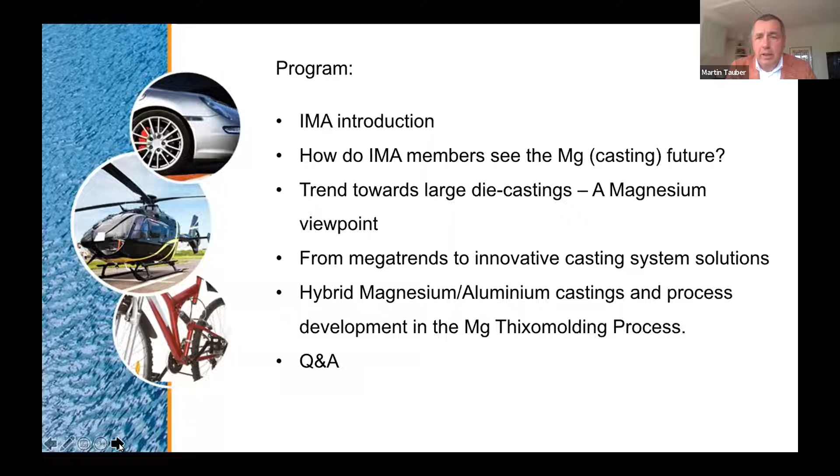What you can expect now in the next hour and 20 minutes or so: you already had the IMA introduction, then we'll show you a small teaser for the industry, especially on casting, and then we have our three presentations, followed by a Q&A. I would like to open up the discussion a bit for the presentations to come.

We made a small questionnaire for our member base, done for the Euroguss event this year in June. It's a little bit focused on die casting, but I think it reflects the whole industry. We see within the IMA that OEMs have a new request or need for weight reduction. We saw that the emphasis on batteries is still there, but there is again the need to make cars lighter, and also to look in that respect for new applications.

From traditional die casting parts, we see a trend toward, for instance, Thixomolding, where we have a presentation today as well. That means electrification of cars will require a new type of parts, which are also served and made via other technologies, the same with 3D printing. I'd say it's coming for magnesium, but not as far advanced as for instance with titanium or aluminium. We'll have a presentation on larger machinery like the gigapress or mega press, so we'll hear a bit more about that later.

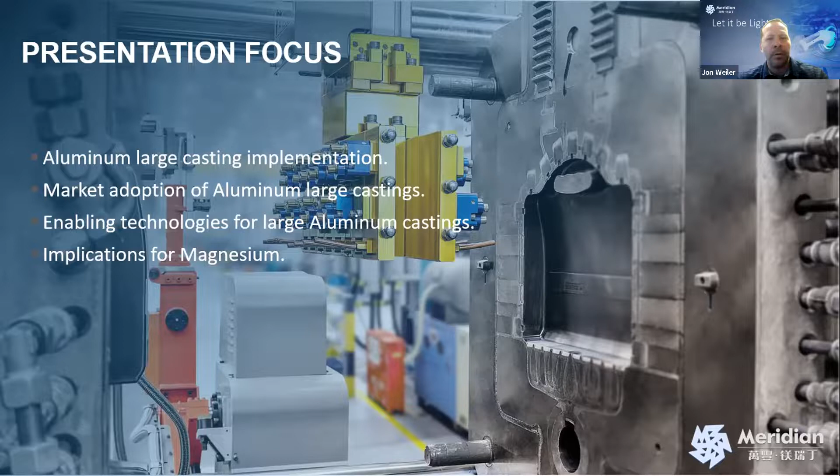The first impression I want to make is when we're talking about magnesium structural castings, and this has been true for a number of years, the key we're always presenting to customers and industry is part integration and consolidation. We're able to get mass reduction, reduction in number of parts, and assembly steps for the OEM. In addition, we get good accuracy and dimensional stability through casting one large shape versus weldments or assembly of multiple components, and we get complex shapes in a single process step.

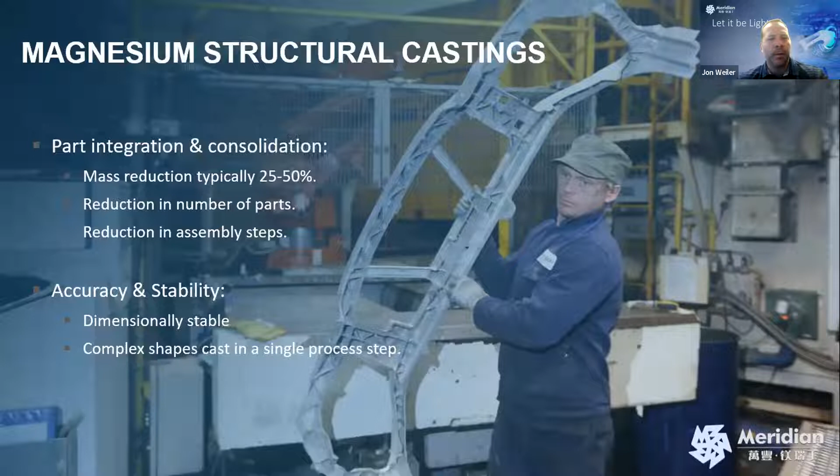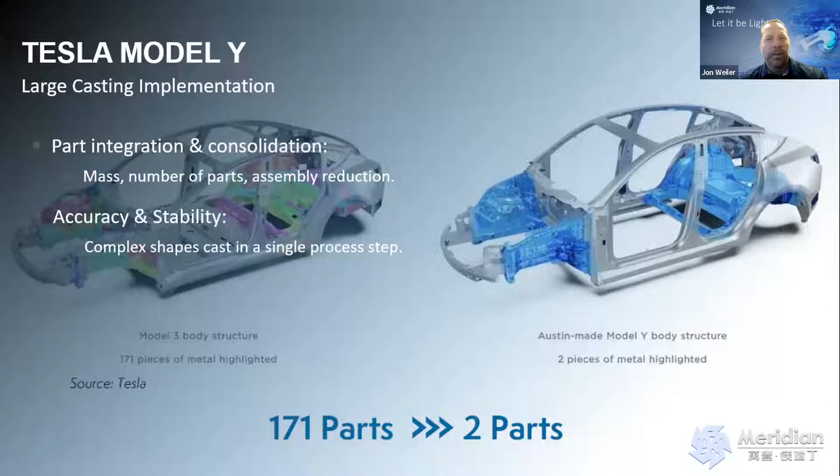As we all know, Tesla has implemented these large or giga castings on the Model Y. This slide that Tesla put out a couple of years ago shows their part reduction—they're integrating and consolidating a number of parts. Obviously it's a part reduction and an assembly reduction in their plant, and they do get some mass reduction in doing this, along with accuracy and stability, casting complex shapes into one step. In essence, what Tesla's accomplished is what we're always pushing with structural magnesium castings—we're looking at the same type of benefits.

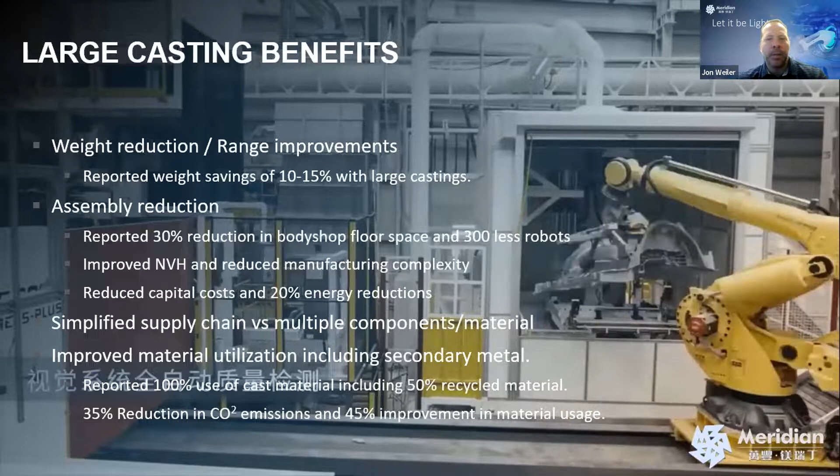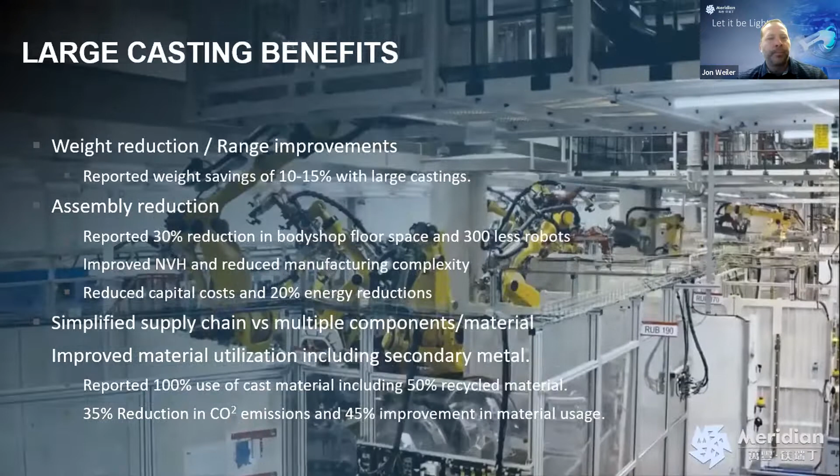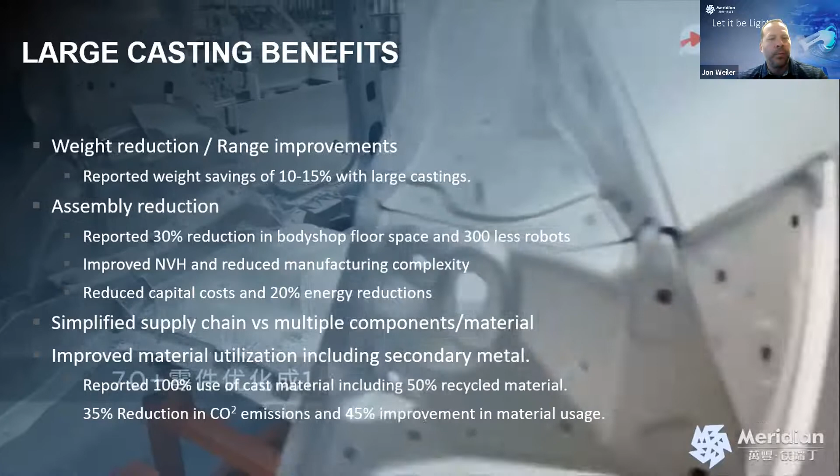Some other benefits that Tesla and other OEMs are impressing upon the market with these types of castings include weight reduction, which translates to range improvements—there's been a reported 10 to 15% weight reduction with these types of castings. There's also assembly reduction: in the OEM's assembly shop they're seeing about a 30% reduction in floor space, and Tesla claims 300 fewer robots are needed. Of course, NVH and manufacturing complexity are improved, along with capital costs and energy reductions in the assembly shop.

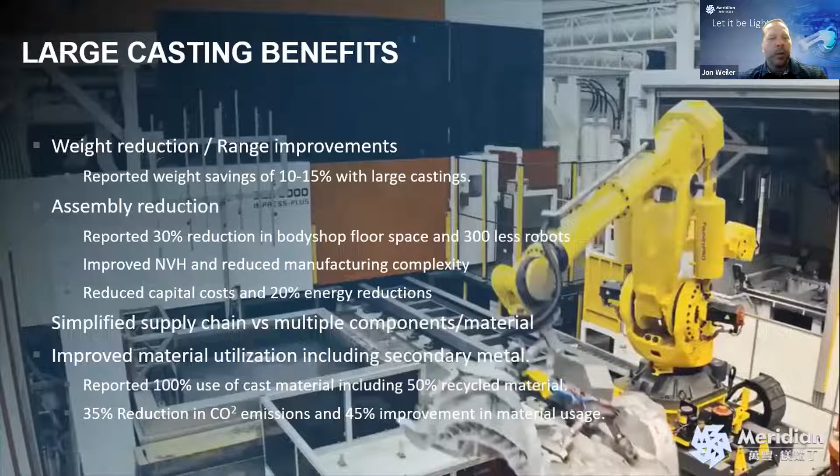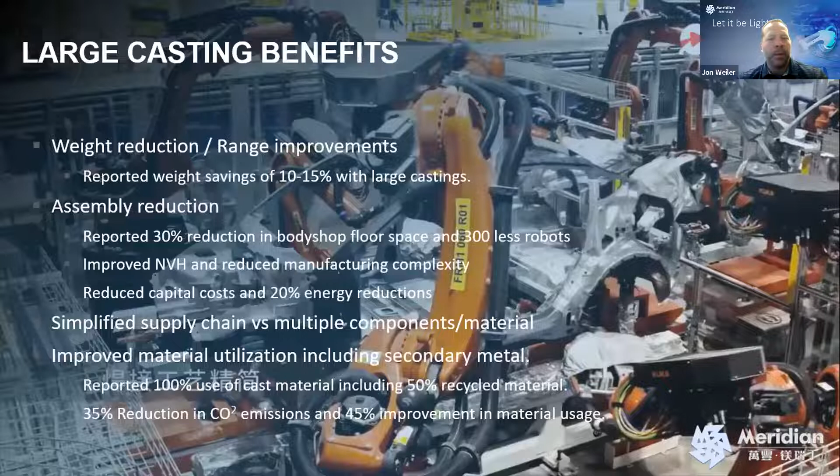The supply chain is much more simplified versus a multitude of components and different materials, and there's improved material utilization, including secondary metal. It's been reported that the plan, I think for Volvo, is to use up to 100% cast material, including 50% recycled material. So we're seeing a lot less waste, and correspondingly reductions in CO2 emissions and material usage in going to these types of castings.

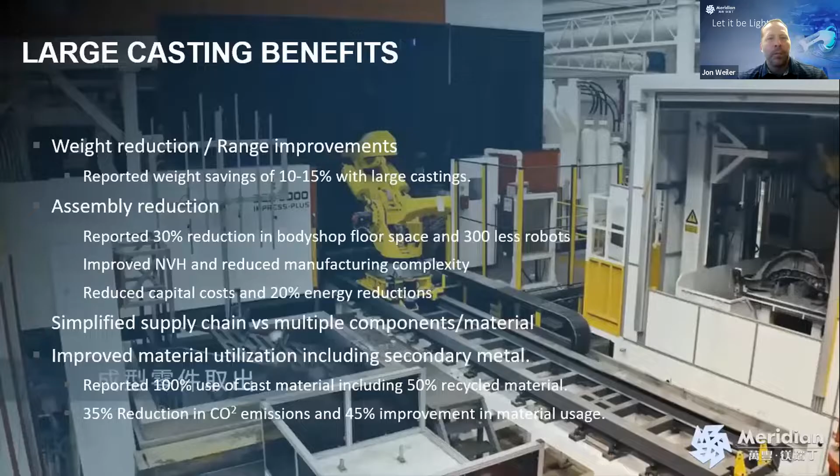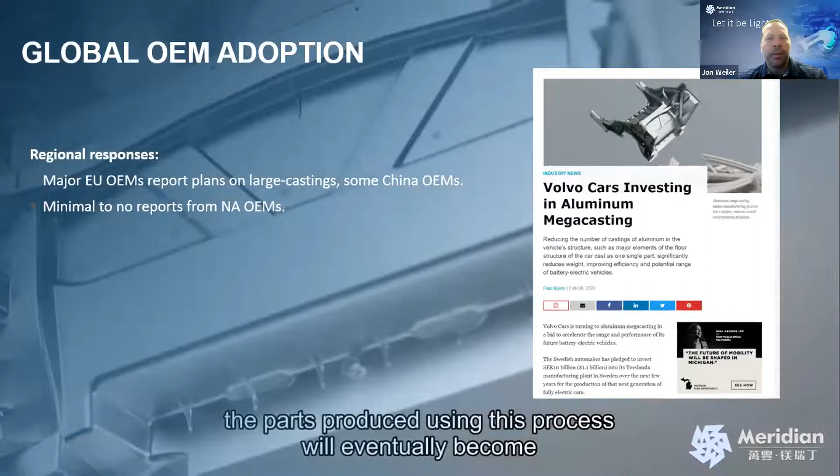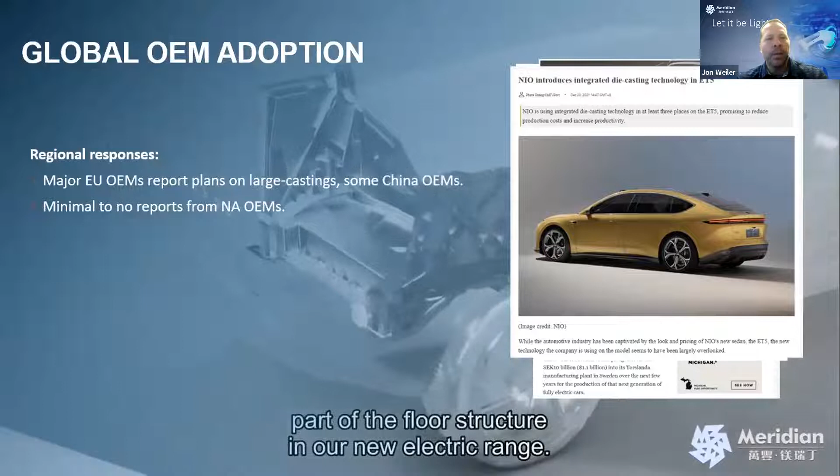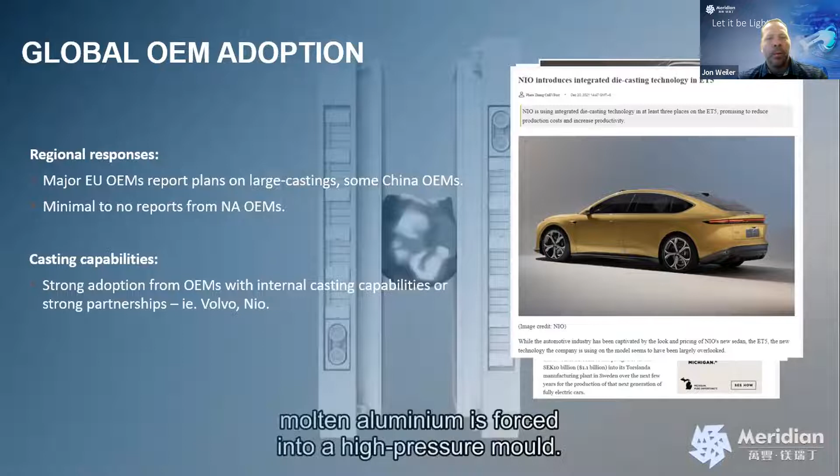So global adoption - since Tesla started this a number of years ago, what we're seeing is Volvo has invested in what they call mega castings in Sweden, getting into these types of castings and ordering large tonnage machines. Volkswagen has aimed to get into this type of casting. Mercedes-Benz is also reported to start using these types of castings. And NIO as well is working with a supplier to introduce these large castings. So we're seeing European OEMs and some Chinese adoption here, but we haven't seen anything in North America up to this point. This is strong from OEMs with internal casting capabilities or strong partnerships, as in the case of NIO.

However, we're not seeing this type of adoption everywhere. BMW, as of last year, is planning not to implement these, due to their evaluation of expensive repairs, casting costs, and because they have other efficient methods to manufacture the chassis in their electric vehicles.

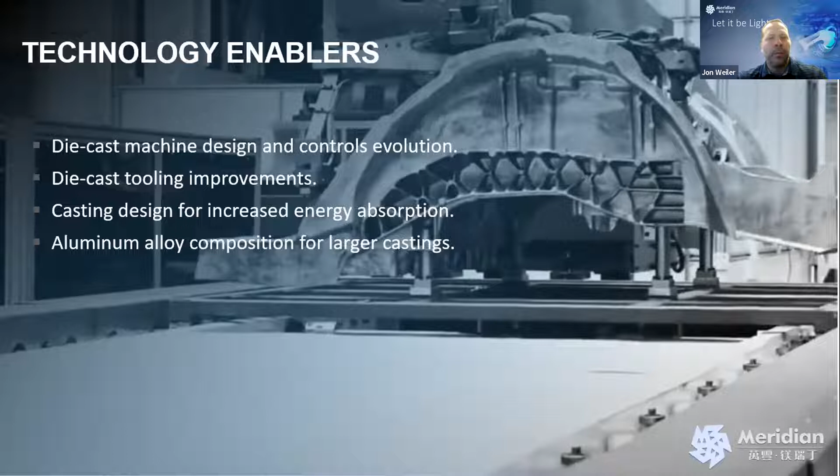So some of the technology enablers that have allowed this type of large casting are die-cast machine design and controls evolution, improvements in die-cast tooling, casting design for increased energy absorption, and new aluminum alloy compositions targeted for these applications. I'm going to go through each one and give some information on how these have evolved or improved over the current standard from the last several years.

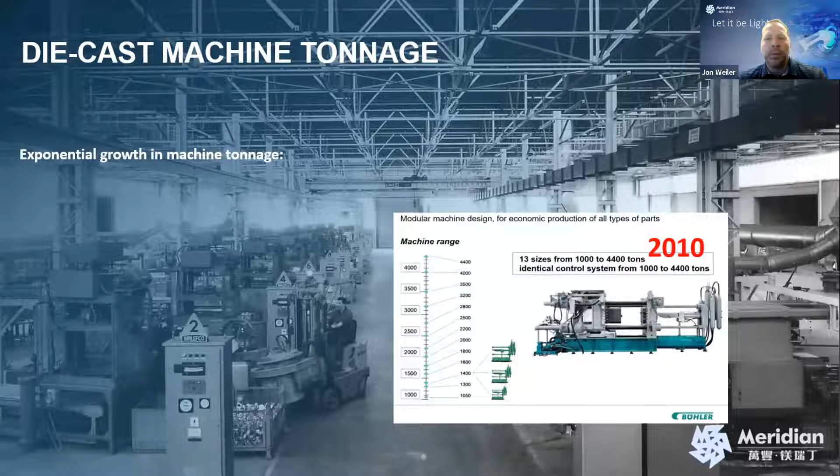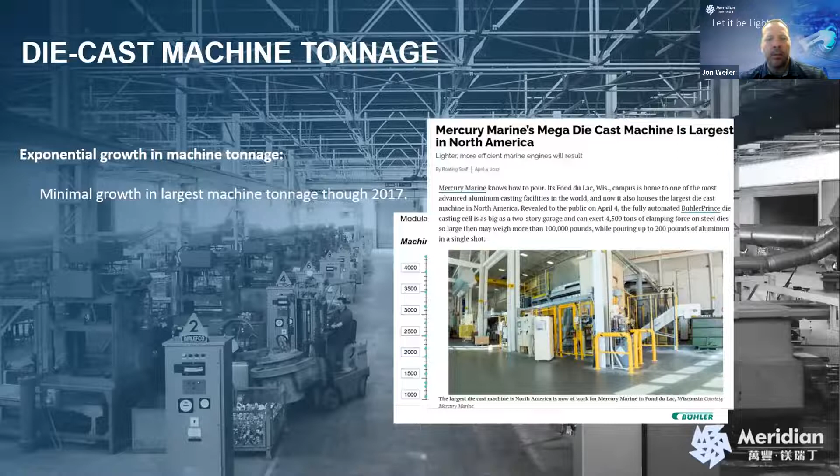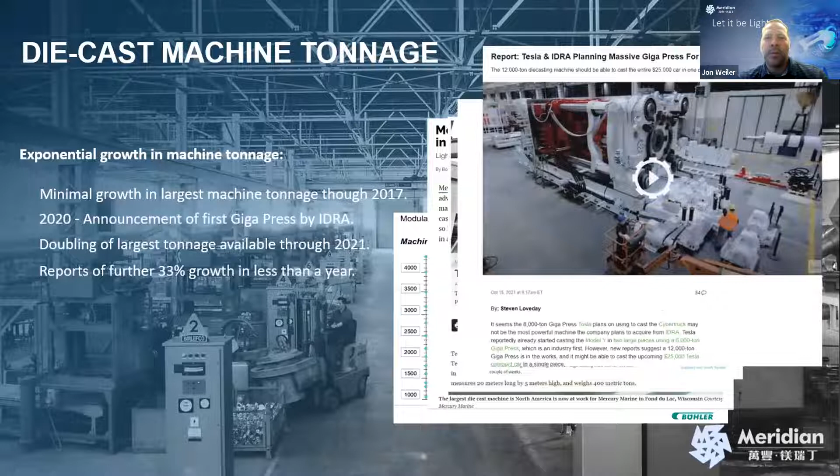Die-cast machine tonnage: this is a slide from Bühler in 2010, showing 4,400 ton machines available on the market, all the way up to 2017, where Mercury Marine is advertising a 4,500 ton machine as the largest in North America at the time. So not much size growth in those years. Then we get to 2020, up to a 6,000 ton machine by IDRA. Later that year, we're looking at 9,000 ton machines, and even further, 12,000 ton machines have become expected on the market. So we're seeing quite a large growth in machine size, enabling these large and even larger types of castings.

Controls evolution: a number of die-cast machine OEMs have improved their machine design and controls in different avenues, including injection systems and hydraulic systems - looking at closed loop regenerative injections, reducing cavitation of the oil from traditional designs, increased pump capacity through separating the closing and injection systems, and high flow hydraulic manifold blocks. So beyond larger machines, we're seeing evolutions in controls, enabling better control and better precision castings.

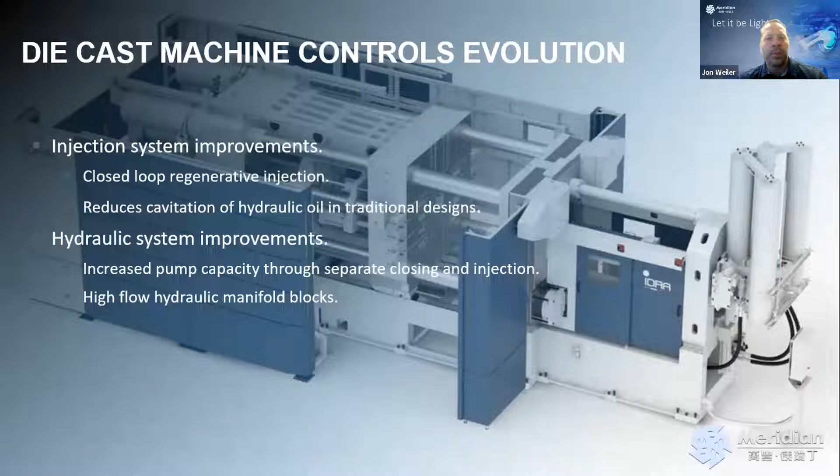Large casting tooling improvements: we're seeing improved thermal management - multi-zone die heating, micro spray for die lubricant, shot sleeve technology. We're looking at heating and wear replaceable inserts to account for thermal expansion, plunger tip design and different material selection, and of course venting and air management - different chill vent designs and modular vacuum systems with multi-channels to improve evacuation of the die.

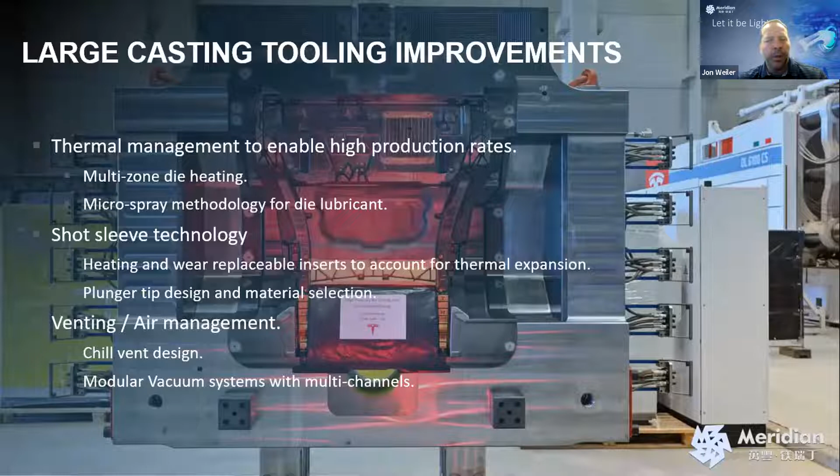We're also looking at casting design for energy management. As electric vehicle design has moved towards a new architecture with structural battery packs, we can enable these large castings. The casting design process involves typical ribbing, variations in thicknesses, and transferring load efficiently. We're able to use alloys with limited ductility versus the traditional wrought alloys used in these types of applications.

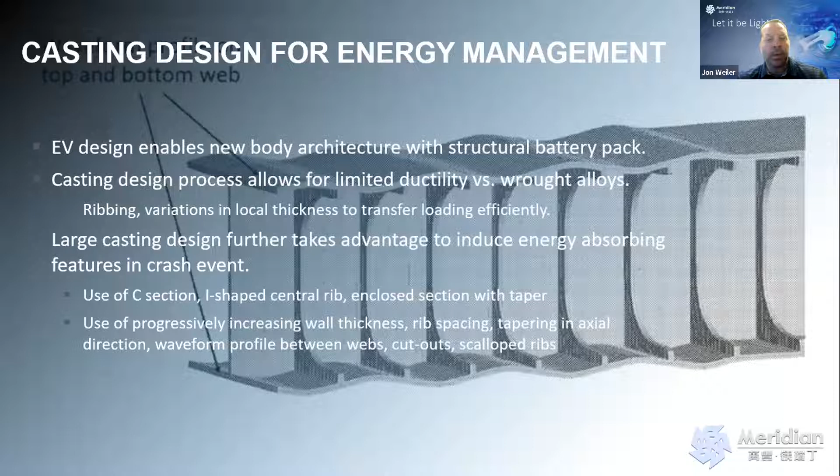Even further, there have been designs in these castings to induce energy absorbing features - the use of C-sections and I-shaped central ribs with waveform profiles, cutouts, scalloped ribs, enclosed sections, and tapering in the axial direction. This is an excerpt from Tesla's patent application, where they have this type of design to absorb energy in a crash situation, shown in this image where the casting section absorbs all the energy rather than buckling right away.

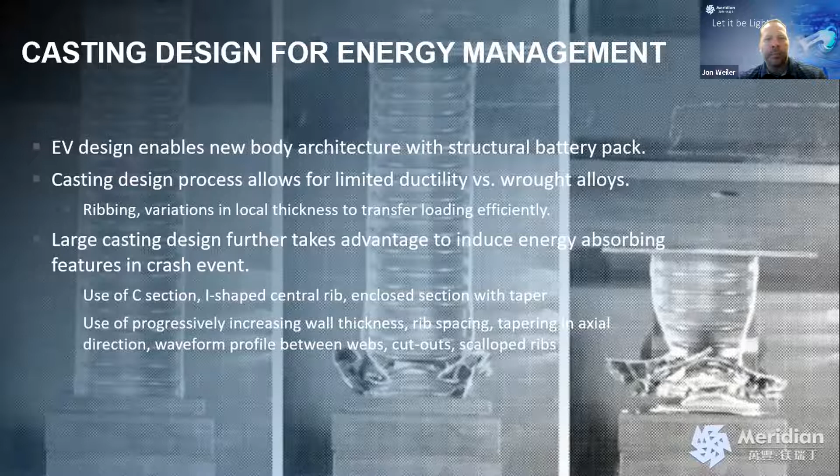So what do all these things mean for magnesium? I'm going to start with the more simple things.

So most of these improvements are beneficial: getting better controls on the die-cast machines, new die-cast tool improvements, and optimizing the die-cast design. These are just going to help magnesium. We're going to improve the consistency in the process, the ability to control with the tooling, different thermal zones, with the controls on the machines, and of course optimizing the cast design. We can look at different ways to optimize the weight and performance of the casting.

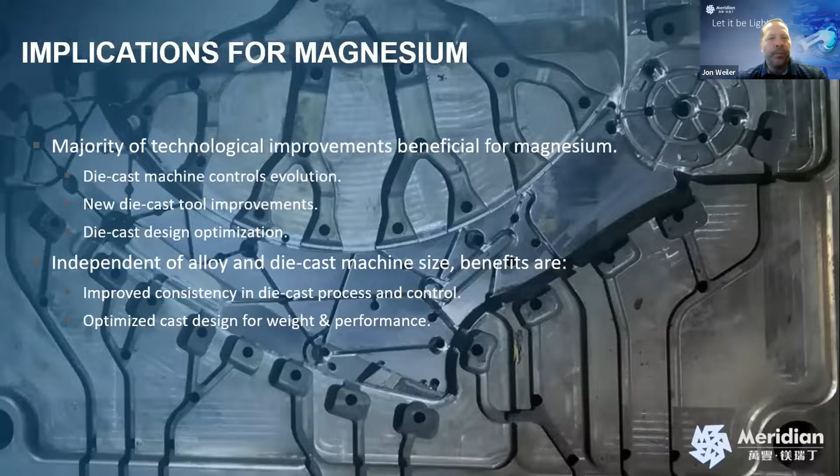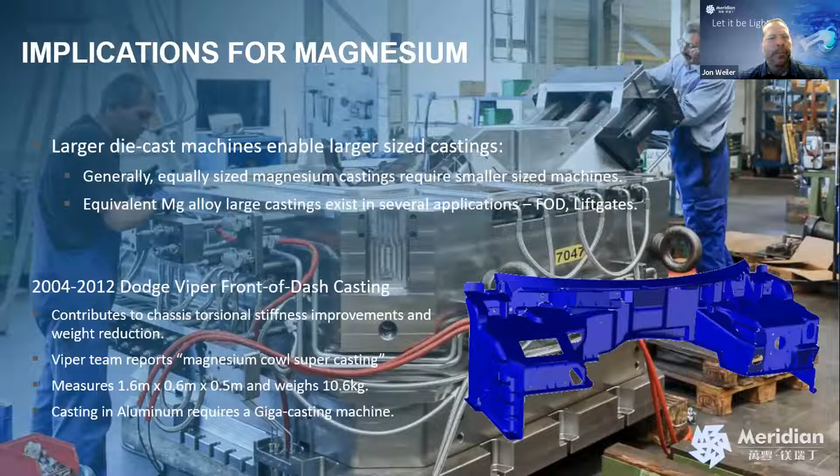And then the last one was the aluminum alloy. So again, the aluminum alloy was developed for strength, ductility, castability with no heat treatment. These target properties we're looking at: yield strength of about 130 with good castability and no heat treatment. It's sounding a lot like a typical high pressure die cast magnesium alloy.

Well, what I wanted to highlight is the alloys that are being developed for these types of castings and the properties that they're demonstrating are already available in the market for magnesium alloys. As you're picking your application, you want to be able to utilize the alloy that you see fit and that fits the properties that you're targeting.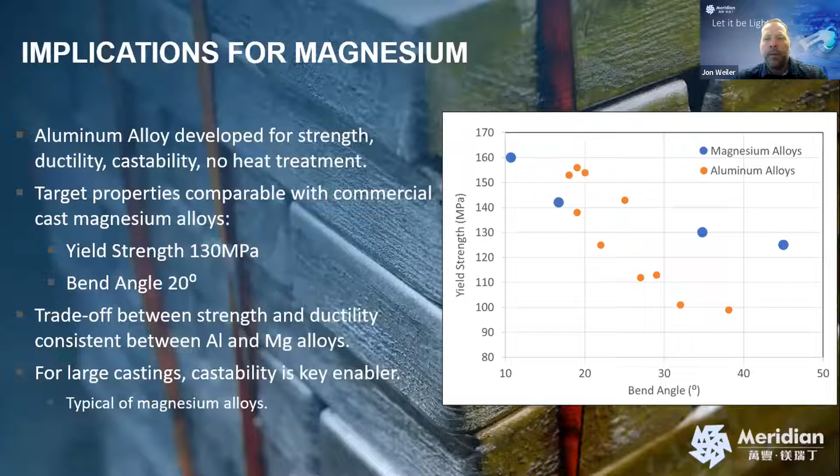So again, what I wanted to impress upon as the key takeaways: as we've seen, the large castings are being implemented in electric vehicle applications. Several different OEMs are looking at this and implementing it in their vehicles in the future, enabling technology developments in equipment design and alloys. These are all favorable for magnesium die castings. And again, we have had similarly sized or very large type magnesium castings in several applications over the last number of years, which, when we get to these larger size machines, we're just looking at potential for even larger magnesium die castings.

So I wanted to thank everyone for your attention today, and I think we have some minutes for some questions.

Martin: Thank you, Jon. That's a very interesting presentation, and also a good takeaway that the magnesium industry has already done giga castings without naming it giga castings. I think that was the big success, because magnesium castings combined a lot of single parts into one for the instrument panel or for the front ends. So this is a typical magnesium application, which you are also finding in the electrified platforms of today. So those parts went over to the new platforms.

I will start directly with an amusing quote from Mark Twain: the human brain is a great thing. It works right up until the time you stand up to give a speech.

This quote always accompanies me and sensitizes me to the opportunity of such a lecture. This presentation should be understood as an opportunity to develop new ideas and products every day. Who of you had a first idea today, maybe in the train or car traveling to the office? I myself often have good ideas at such lectures, and hopefully you can develop at least one own idea after this lecture is done.

First, I would like to present the opportunities that we foundrymen have, and not, as is so often the case in today's world, just the challenges. To do this, we must translate the megatrends of our times and use them for derivation to our companies. Subsequently, innovation must be recognized, and how can this look? I will show that with some examples, and of course we will also take a small look at sustainability.

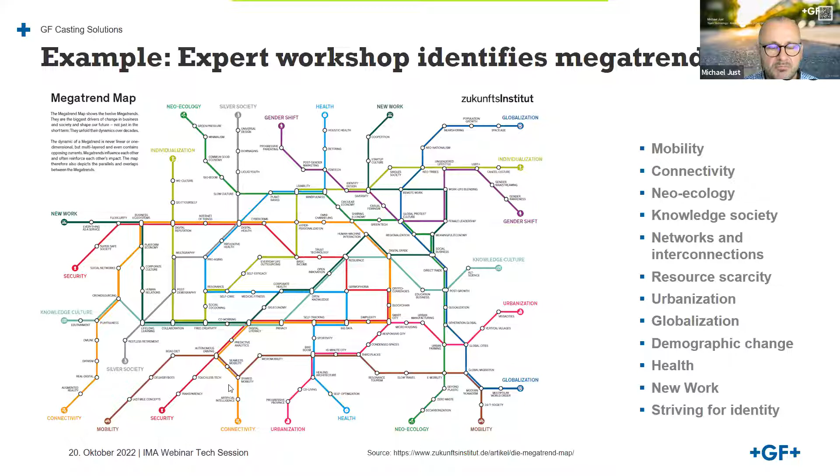In the following simplified example, I would like to present a possible derivation for development, to make it more touchable. As you can see, I have picked out 3 megatrends and divided them into subtrends, technologies, and development fields.

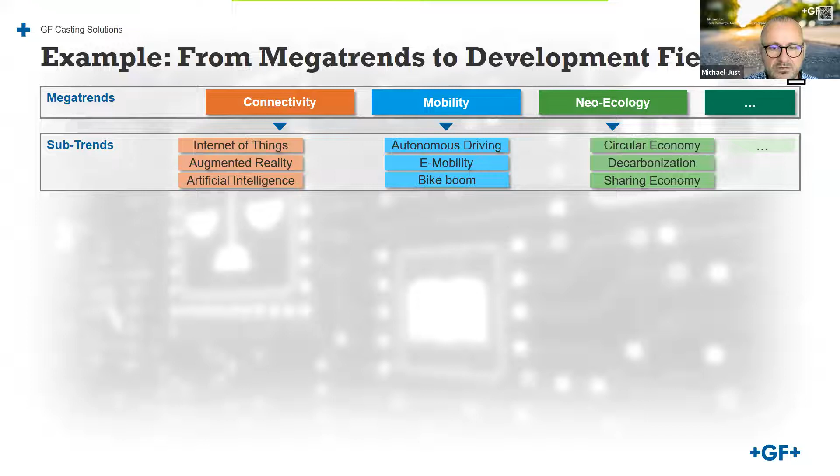I would like to explain it briefly using mobility as an example. The subtrends - autonomous driving, e-mobility, and bike boom - are certainly real subtrends for our industry. The technology fields of alternative vehicle systems, electrical powered vehicles, smart castings, and mega casting, which can be identified here, are really known. The development fields that result, such as battery systems, power electronics, e-motors, charging stations, fuel cells, closed sections, and high-pressure die casting, are specific ways to derive product strategies, but you don't yet have a product strategy.

Therefore, I will show some examples to make it clear. As you can see, I have picked out these 3 megatrends and divided them into subtrends here.

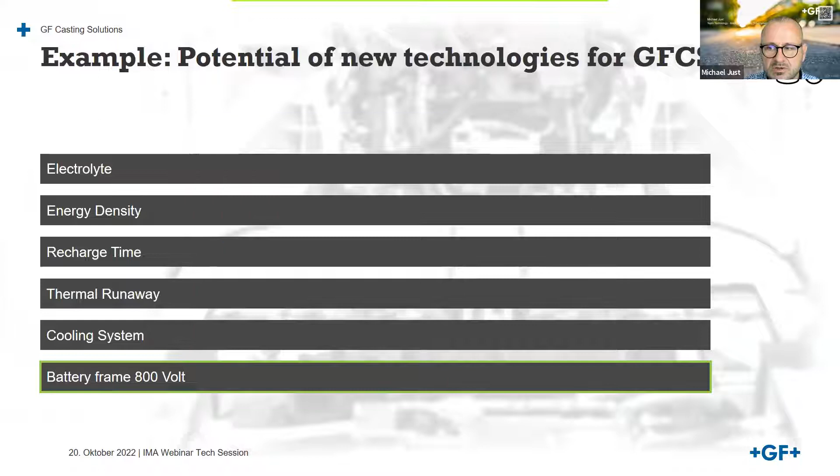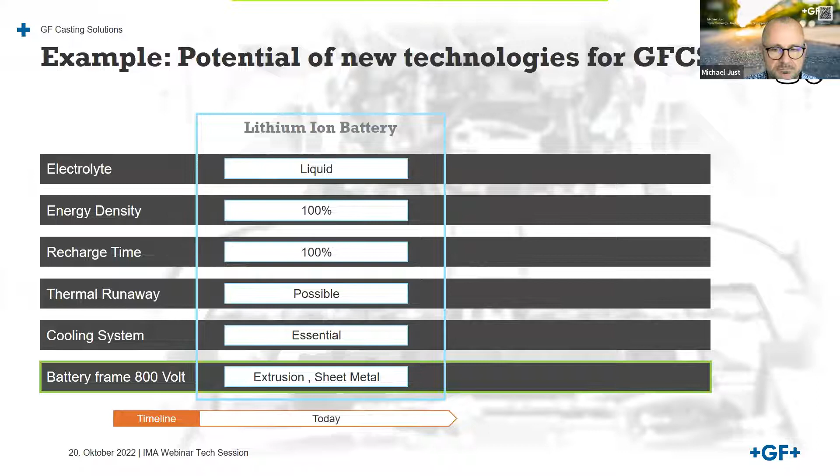We're going to the batteries we already have today. What you can see here is, if you compare the existing lithium-ion battery to the possible coming solid state, it becomes obvious that this is a good chance for the foundry world. As you know, batteries get bigger and bigger, and these mega castings are difficult to cast. Therefore, a lot of battery trays are built up from sheet metal. If now the energy density increases as proposed, there is no need for such big battery trays, and we can cast it with existing equipment. This is, of course, also a sustainability effect. Furthermore, the secureness and the quick charging times will be a massive door opener for this technology.

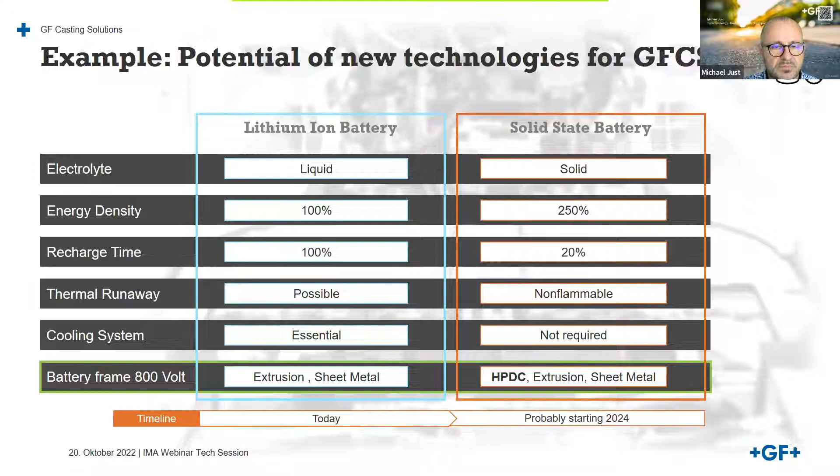Mega castings - as Jon already presented, I have also some notes for that. The big topic of mega castings will guarantee a chance for development in the foundry business. These big castings have an issue with distortion, and therefore you will prevent the heat treatment. Cast alloys, compared to wrought alloys, have some challenges to perform in the same way as sheet metal. Therefore, you need some nice ideas to design.

You can develop that through hybrid casting. You can create crash alloys. As I already mentioned, smart product design is a key door opener, and as well, joining technologies are chances for the die caster. NVH you can provide with compound casting and closed sections in hybrid die casting, and you also have opportunities to develop new tooling concepts.

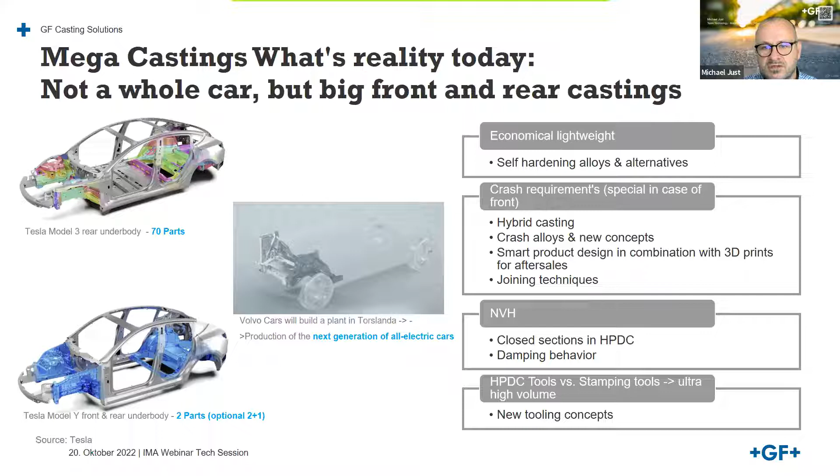And as you see, we have the first movers: Tesla, Ford, Volvo, and for sure the Chinese newcomers.

Artificial intelligence, this is the third one I will show. Why do companies have to deal with AI? It's often offered by the IT department as a new service, or as modern, or as cool, but it will probably be important in the future.

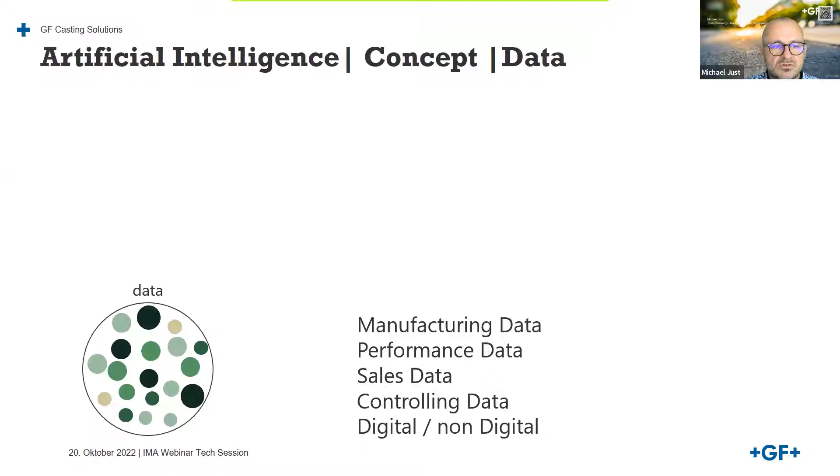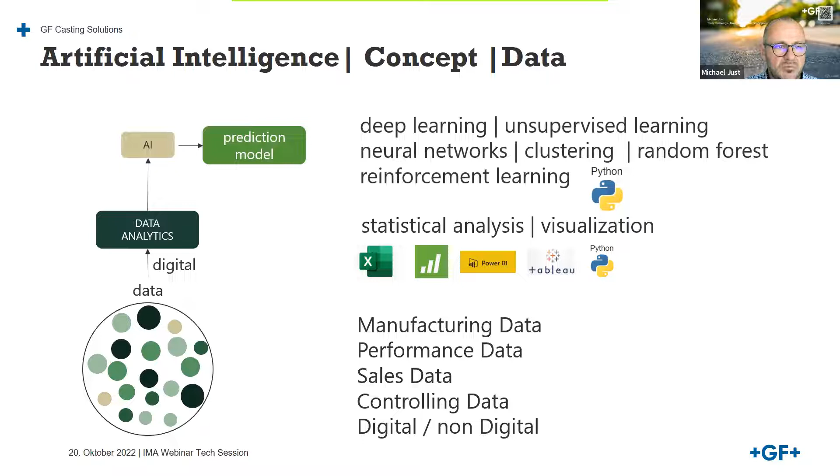It is maybe the best way to achieve process optimization. But often your data were collected in the foundries as manufacturing data, performance data, sales data, controlling data, but it isn't in the right form. After that, you have to do data analytics, and there's some software for that, and after that you take the AI and make a prediction model.

Using an example of a die casting component, it quickly becomes clear what variety of data must be foreseen. Special attention should be paid to the appropriate assignment of the data, whether this data makes sense in the evaluation of individual events. If the data forensics is not performed correctly, a wrong learning curve can be generated very quickly, leading to a wrong prediction.

In the experiment carried out here, the startup curve of a product, or its startup scrap, was examined, and after various iterations this leads to a massive reduction in the ramp-up phase for scrap, as you can see here. The blue one is the original, the red one is supported by AI, and you see it's very, very fast, and we have less scrap.

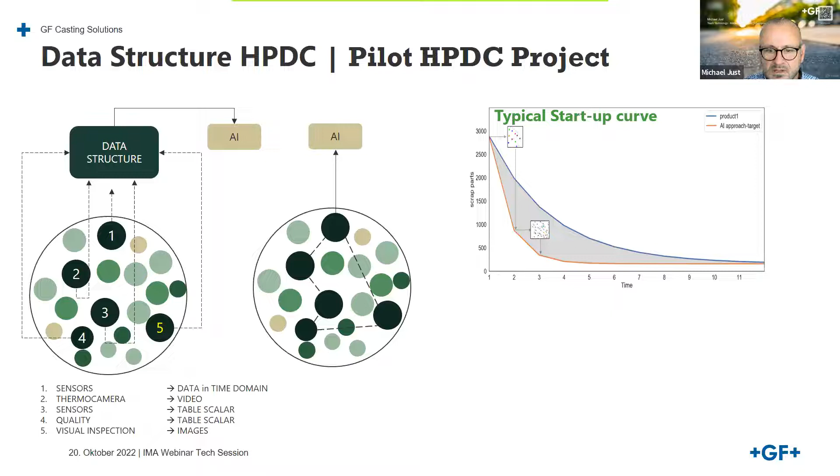If you want a closer look at this topic, I recommend looking at the open source material on the World Wide Web. It's amazing how comprehensive the linkage of this data is that's freely accessible.

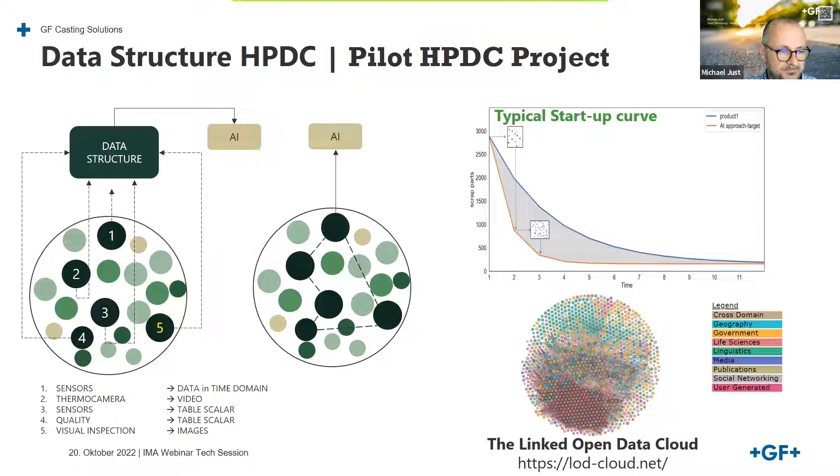We at GF Casting Solutions will also have a further deep dive with AI in product development. We will still work on the operations side, and we will also start to have some material development, or at least we try to.

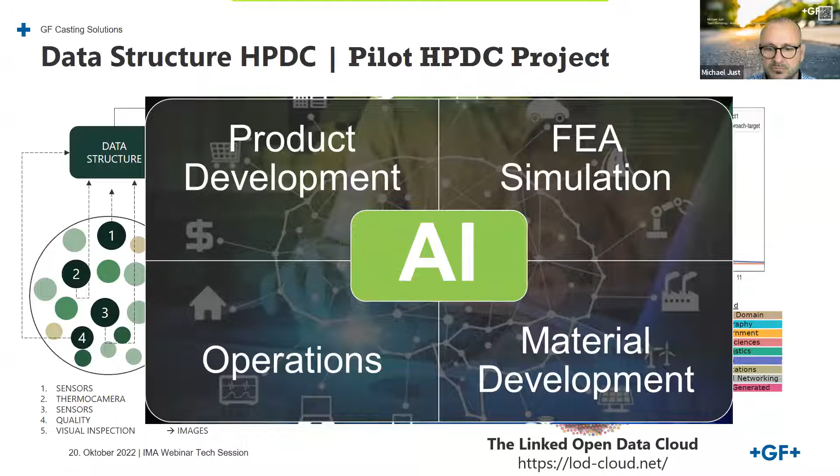As you have seen, you always have a lot of possibilities, but still no product or idea, so you have to read it carefully. Innovation, that's what's needed, is a multi-step process by which companies transform ideas into new, improved products, services, or processes in order to successfully compete and differentiate in their marketplace.

Using current battery technology, as already mentioned, as an example, I would like to show that there is a chance to move from lithium-ion technology to solid-state technology. The battery cases will not have to look anything like they do today. One of the manufacturers that has already made this public is NIO, they will go for solid state.

The task now is to develop the needs of tomorrow in terms of requirements, component size, functions, and charging technology, as sustainably as possible, perhaps even with the existing equipment. This technology could again be one of the game changers between built battery systems and cast battery systems.

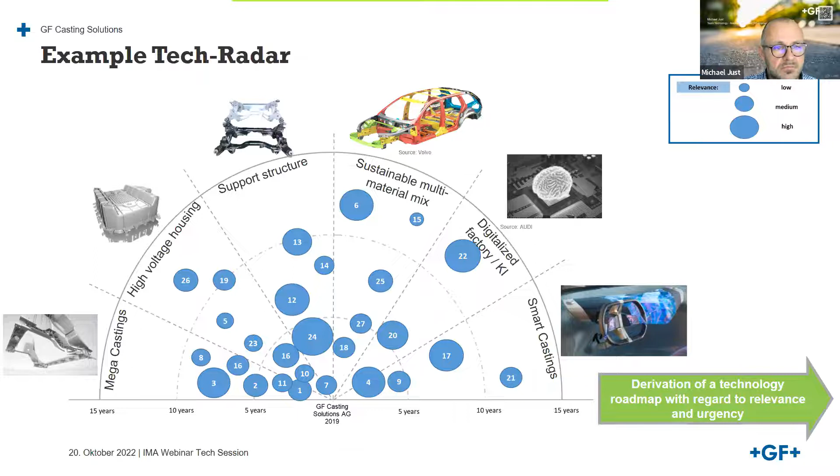And from that, you can have some clearer points where you have to go. From this tech radar and the concept proposals on the market, the task now is to find the right product.

A possibility could be driver experience, which will change in the future, and that directly changes the casting products behind. Transfer of functions to the component surface or the other functions in the center console never looked like it looks today. For example, e-bikes, where the function moves into the components, or public transport, which in the future will also take over functions in the seat structure, and the structure is also a casted structure, and find their way into the window frame. And the window frame is also casted. So a lot of opportunities.

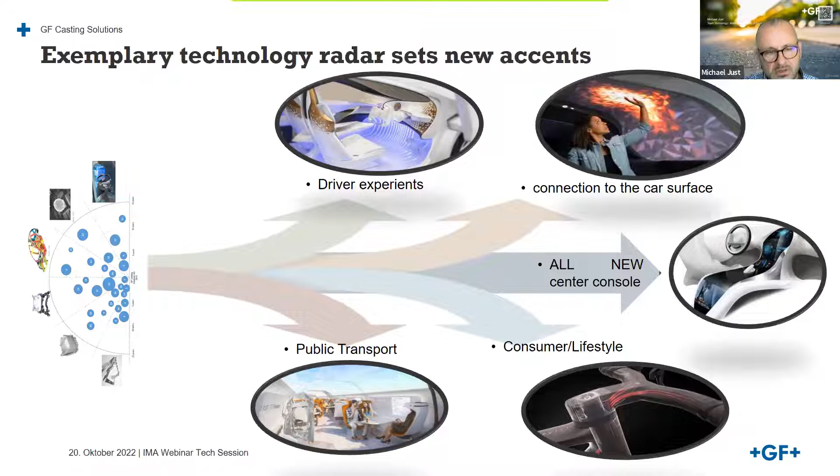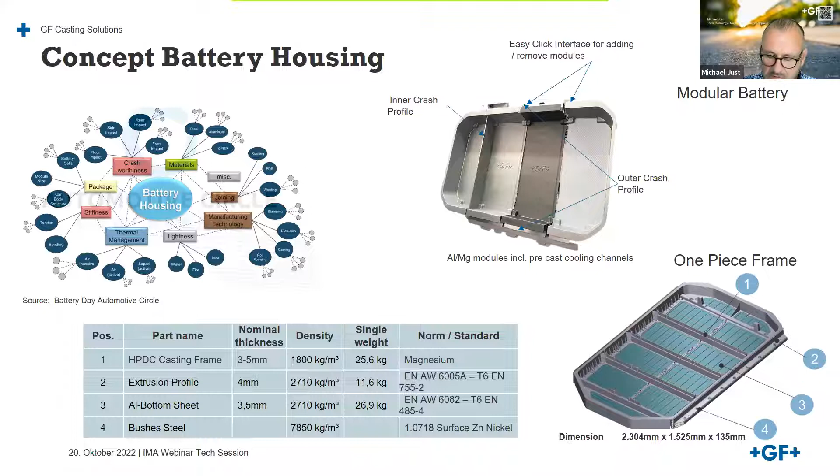The task now is to copy this example for die casting components and adopt extended functions, following the way of the shown slides: deriving the trends, using the tech radar, developing your product strategy, and then creating your idea. What this might look like is shown in the following slides.

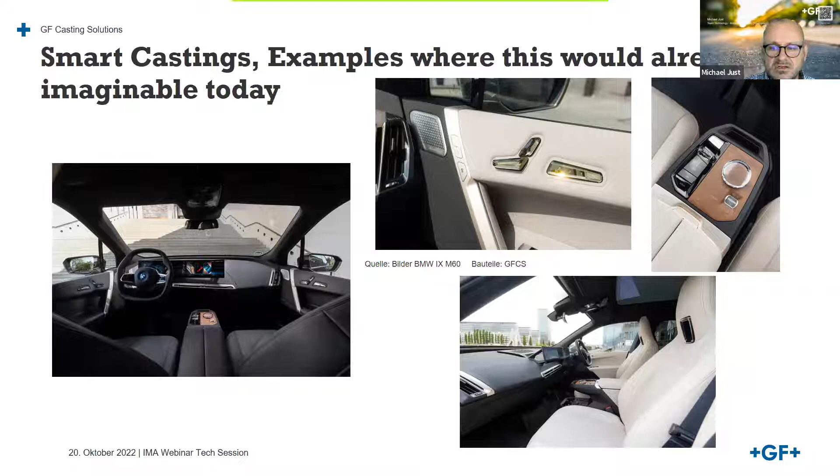The basic structures are well known today, and digitalization is advancing steadily. So why don't we simply adopt the screen frames, ventilation systems, in the crosscar beam, or the lighting of the door control elements?

Even the center console can directly take over the cooling unit, the induction coil, or the control element holder. Even the seat frame can take over the ventilation supply centrally, and also the brackets of the electric motors, if we have a good product idea that also supports lightweight construction. So we're already there and we can start.

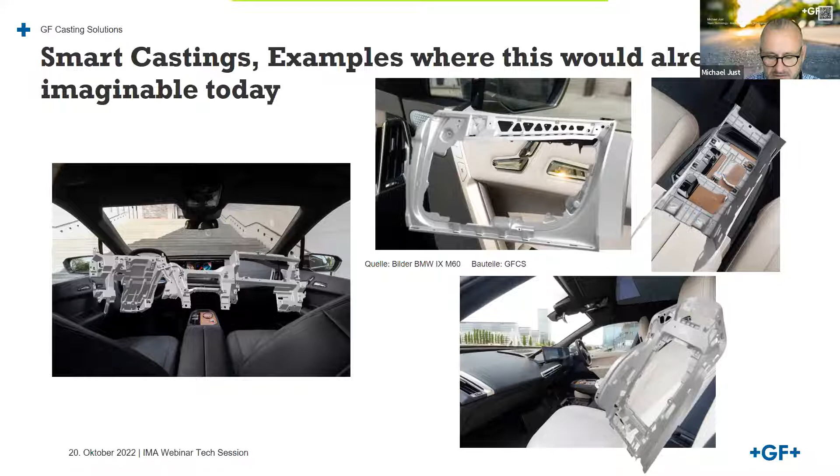And now, if you have the chance to produce visible parts in the vehicle interior, as shown here, it is obvious to integrate the so-called ambient lighting into the components. It is also easy to integrate a screen frame for displays. Furthermore, it's only a question of time when such visible components are combined with the underlying cross-car beam, for instance. The new components do not necessarily have to follow the old component design rules, but can, of course, also take on other forms.

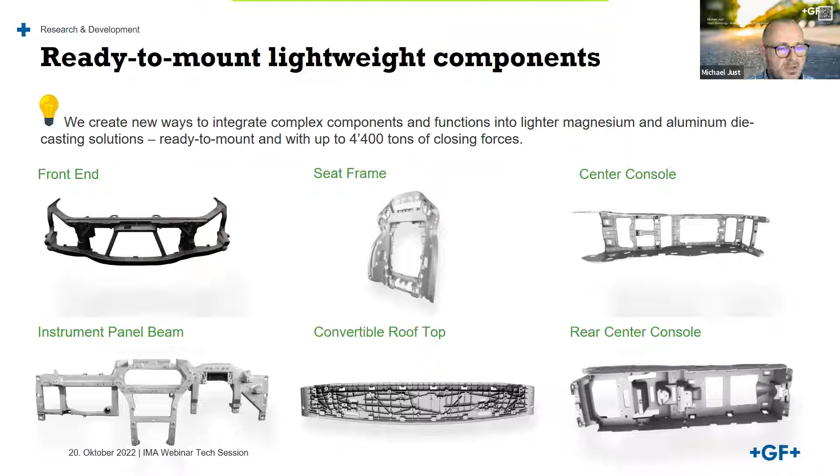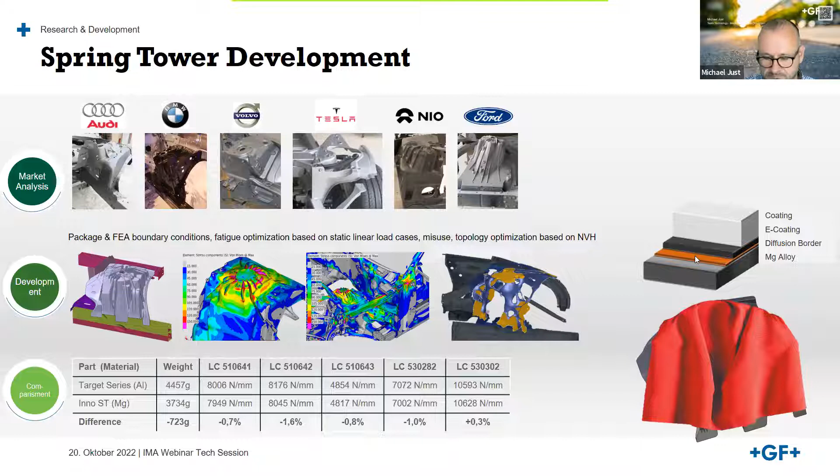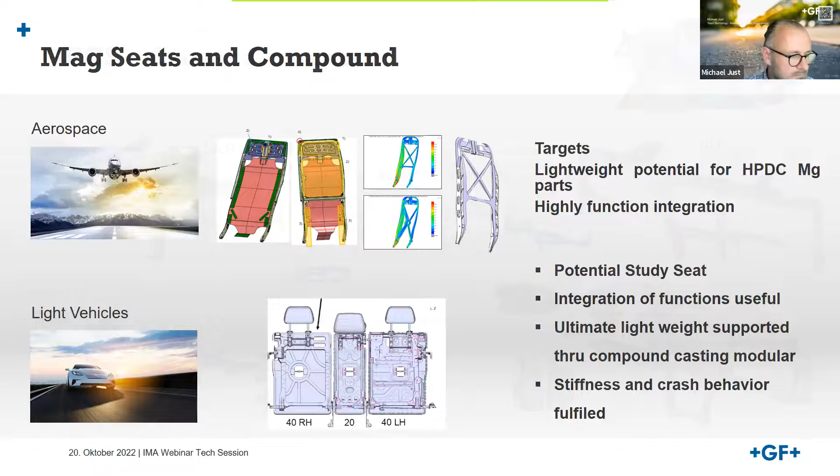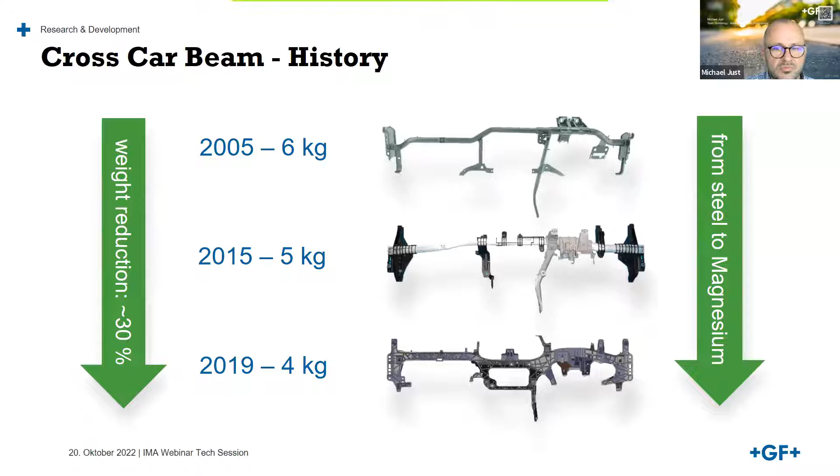In the case of megacasting, you also have to ask yourself, why aluminum? The existing aluminum casting concept requires in-gate cross-sections, for instance, wall thicknesses necessary for casting, which therefore cannot fully exploit the lightweight potential of aluminum.

With a suitable design, magnesium can bring its full lightweight potential to the megacasting due to its better flow behavior. And of course, a suitable coating concept must also be used here, and composite casting may also have to be considered in this case.

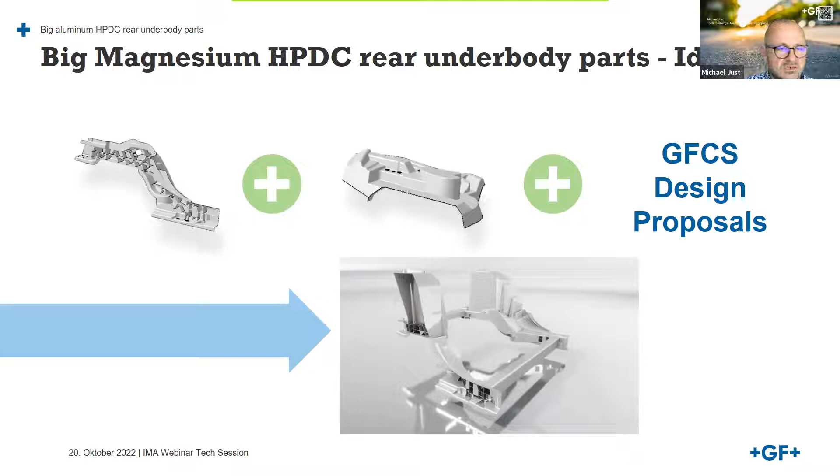And that is what it can look like. We have done a simulation with the magnesium material to see what we can fulfill with which machine size and so on, but it's still under development.

Now a short look at sustainability, which is important in the coming months. As is known, the best way of recycling is to have no recycling.

The recycling path of today's magnesium products seldom comes back to the foundry, even not sorted by alloy, but rather often migration to other industries is seen. In the future, it will be necessary to close the loop more and more, which will make recycling much more energy efficient compared to the primary route.

Furthermore, in the future, a reuse of the product should be considered, for example in another industry, like battery cases from vehicles into storage batteries for households, or possibly with a slight adaptation in a new vehicle. And for sure, we have to exclude lifetime-stressed components; they don't want a reuse or second use in the same geometry.

We are already making constant efforts to reduce our energy turnover. Based on 2019, our energy turnover consists of 6% for gas, 16% for electricity, which already comes from solar and hydroelectric plants as far as possible, and 78% which comes from material supply. But the 78% is the average, including aluminum.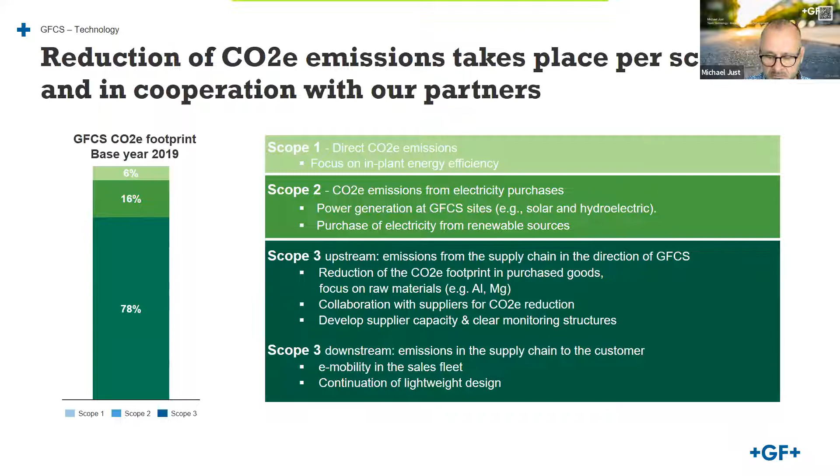It is therefore quite clear that in the future we will increasingly focus our interest on material production from sustainability-generated material sources. An overview of future sources generated with sustainable green electricity is available from the IMA. And because sustainability is at the heart of our strategy, we already deal with recycling cast alloys, but we have to improve the CO2 values, as shown here on the left-hand side.

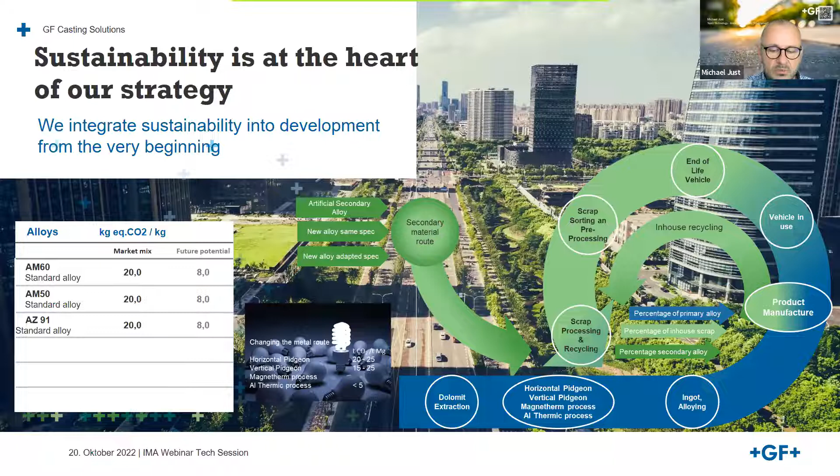And then I'm done. So hopefully I have inspired you, and I'm open for questions.

Thank you, Michael. Also, thank you for stressing the sustainability topic, and the process for showing the OEMs and our customers that we are willing to provide a more sustainable product in the future, also from the primary route, but also from the recycling route, so that magnesium takes part together with all the other materials in a greener future.

We have some questions, I think they're already answered in the chat. So I will go over to the last presentation of today, from the company 595 Solutions, who is the youngest member of the IMA in the trio presenting today. I would like to give some credit to Arne Amann, the managing director of 595 Solutions.

I will very quickly introduce 595, and then Christian will take over the technical details. 595 is a die casting company which has been around since 1948, and has been taken over by us at the beginning of 2021. Since then, we have not only restructured the business somewhat, but we have also started to invest heavily into magnesium Thixo-moulding, which is where we met Christian, and have developed some new product ideas, one of which we will show you today.

595 is traditionally based in Germany, headquarters still in Nuremberg, although the production footprint is moving slowly but steadily to Romania. We now have 20,000 square meters of production site in Romania, around 10,000 in Flossenbürg in Bavaria, and a legacy machining location also in Bavaria, where we employ another 60 people roughly. Overall, there's around 550 people currently working for us.

Christian, if you can switch over to the next slide, please. We are supplying mainly automotive, e-mobility and aviation customers. We try to be a one-stop shop as much as we can, from development, casting, machining, finishing. We have a coating line in Romania as well, and we assemble wherever it is required and desired by the customer.

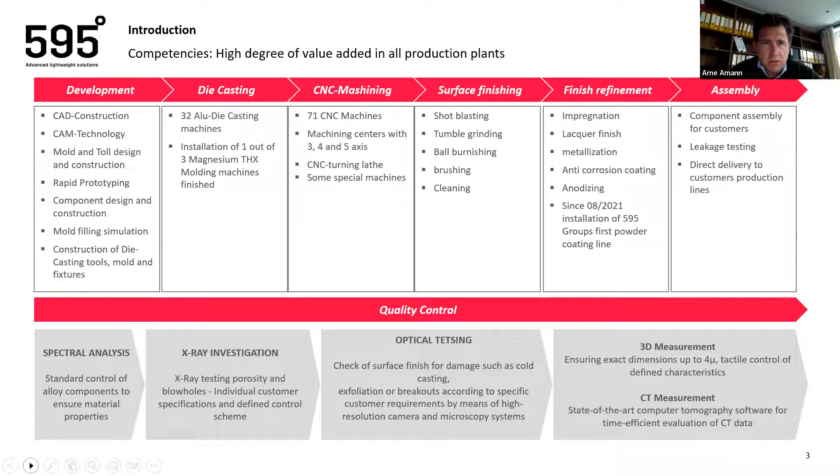Also for the introduction, as Arne said, we are mutually working on a new concept to produce battery housings. The problem we are trying to solve is that, from our point of view, current battery housings are still too heavy and still too expensive.

Usually they cannot use magnesium, or at least the tier ones do not yet use magnesium in battery housings. As we are focusing on Thixo-moulding, we have no other option than to use magnesium alloys, and that's why we try to figure out a way to also apply it to battery housings.

Michael just said that sometimes these IMA webinars can inspire ideas. It's funny because actually this idea was somehow inspired by one of the presentations from last year, which introduced the possibility of joining aluminum with magnesium. But back then, no one could answer the question of what the application for it would be. And I'm quite confident that we found one application for it.

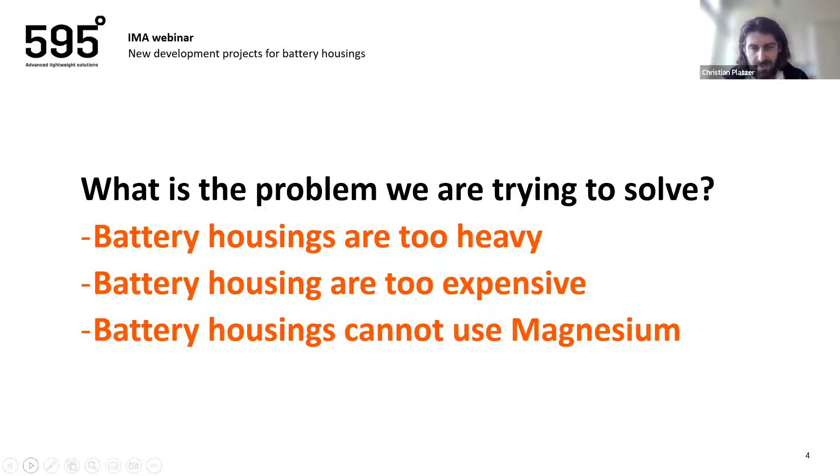So let's go into more detail. Today we already learned a lot about battery housings. Maybe I can add something to it that we learned during our investigation of that topic.

As I said, currently mainly aluminum is used to produce battery housings, and they tend to get bigger and bigger. Maybe in future they can get a little bit smaller if the chemistry behind it can somehow be changed or improved, but currently they're getting bigger and bigger.

The first thing used to produce those battery housings was aluminum extrusions or aluminum profiles that got assembled. The advantage of those aluminum profiles is that they have a very good flatness, which is important because we need to control the temperature of the battery cells in the housing.

This is usually done by controlling the housing bottom temperature, and the bottom, via heat transmission, influences the temperature of the battery cells. To ensure good heat transmission between the housing, which acts as the heat exchanger, and the battery cells, you need a very good contact surface, and you need good contact. Therefore you need good flatness, and this is something extrusion profiles can provide right away.

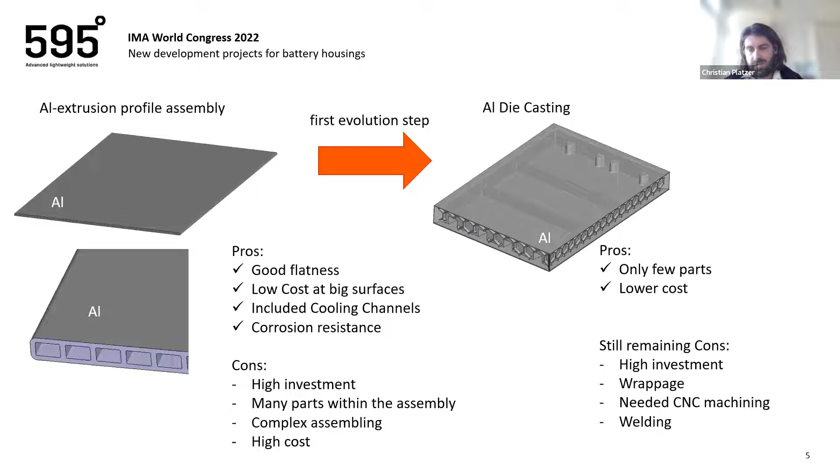But even in this evolution step, you still have some remaining drawbacks that we will investigate a little closer in the next slide. You still have a high investment in very big machinery, we have warpage from the casting that we somehow need to deal with, and to close the cooling channels, we need a welding process. So this is an example of a rather small battery housing with a dimension of 700 millimeters to 1 meter.

The requirements we need to meet include, for example, flatness of plus minus 0.6 millimeters on the contact surface to the battery cells. To achieve this flatness, usually the aluminum die casters have to mill the complete inner surface of the housing.

And also the backside, because the backside, number 4, is covered by an aluminum sheet that you need to weld onto the bottom. Before you can weld it, you also need to machine that surface. At least this is what we hear when talking to many companies that are doing this.

By considering this rather small dimension of a battery system, you already need a 5,500 ton machine in aluminum die casting to be able to cast it. Although there is this hype of die casting machines getting bigger and bigger, we learned that there's not so many on the market, and it's very hard for foundries to invest in those machines, because the volume of needed battery housings is not so big. So usually you cannot fill your die casting machine with only one contract, making it hard for the tier ones to find enough suppliers.

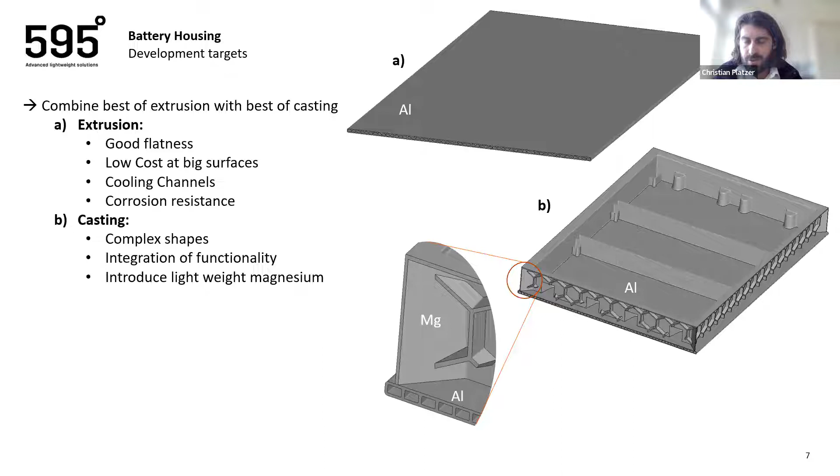Only because of the lower density, we can save lots of total weight, and we only apply it in the areas of the housing where we do not have to deal with the drawbacks of magnesium, like corrosion. And this rather small battery pack—

In die casting, if you want to make it in one cast shot, you would need a 5,500 ton machine. With our strategy of over-molding the aluminum profile, we can do it with a 1,600 ton Thixo-moulding machine.

The reason for that is that we do not need to clamp the area of the aluminum profile. We only need the clamping force of the machine to clamp the projected area of the casted material, and the casted material has a very small projected area.

The area in between where we are placing the battery cells does not contribute to this projected area, and therefore the machine can be much, much smaller. And smaller machines are much more available on the market than the big tonnage machines.

In this case study, we have been able to reduce the weight of the battery housing from 16 kilograms to 12.7 kilograms, providing more or less the same geometry.

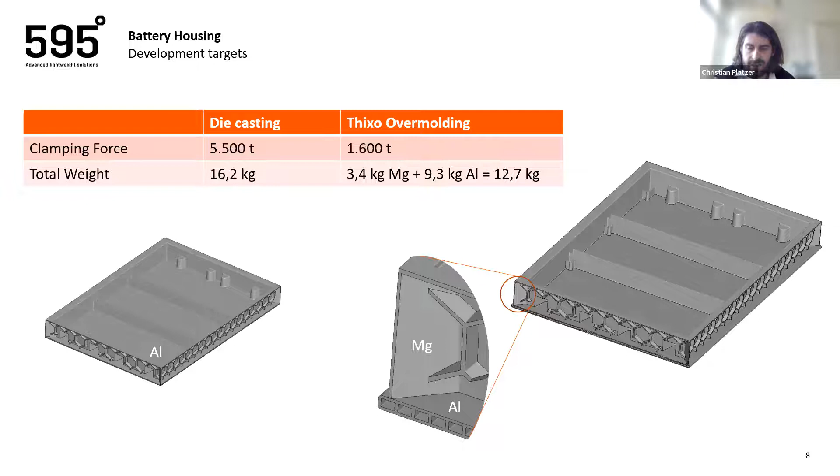The technology we use for bonding the magnesium onto the aluminum is the over-molding of the aluminum profile with semi-solid magnesium, and we are doing this into laser structures. So there's a preparation process where we need to structure the surface of the aluminum profile in those regions where we want to overmold the magnesium. Basically the area you need to prepare with the laser is the same as the projected area of the magnesium. We have already tried different laser structures, and this is also something we are continuing.

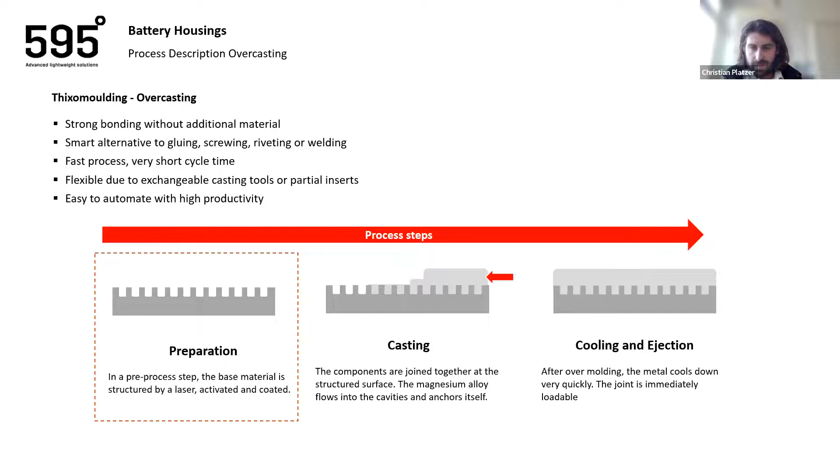There are many different institutes and companies focusing all their research on the perfect parameters for lasers, and we learned a lot in the last months about what's working well and what's not. But we have been able to produce smaller prototypes with this concept.

Even though this is a very small prototype, we've already been able to show the basic idea of saving money, needing only a 280-ton machine instead of a 400-ton machine, which would have been needed at least for cold chamber die casting because of the pressure. By using the aluminum insert to take over most of the projected area, we've been able to do this on a 280-ton machine.

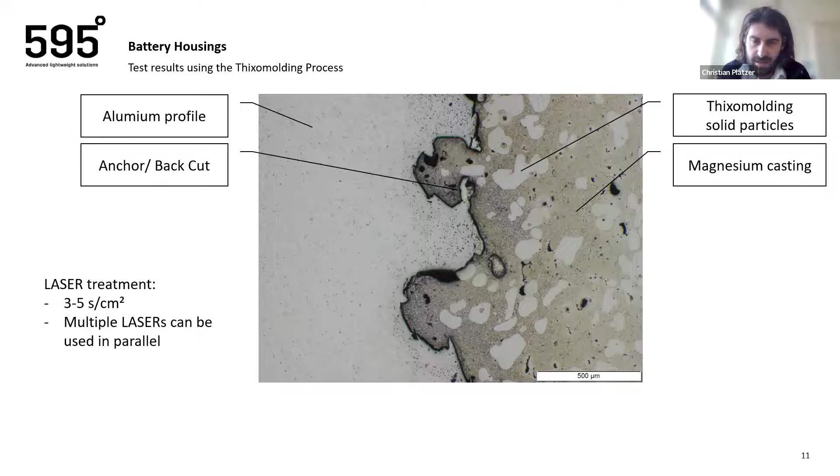So for the next steps, we are still testing further laser structures with different geometries. We are already working on solutions for automating this process, because we found that the laser structure needs to be quite fresh before overmolding, so there needs to be just-in-time lasering next to the die casting machine. We have already started to develop a larger scale prototype, similar to the size you saw at the beginning of the presentation.

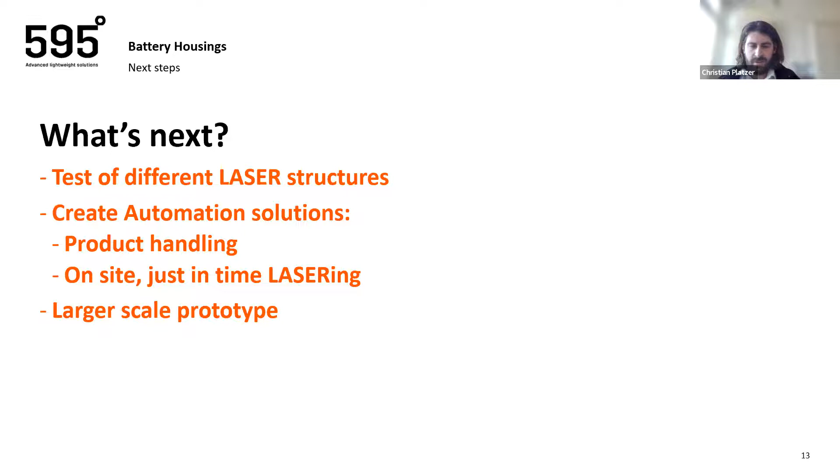Thank you for your attention. I hope it was interesting for you.

Thank you, Christian. Thank you, Arne, for the very interesting presentation and the way forward with a new process.